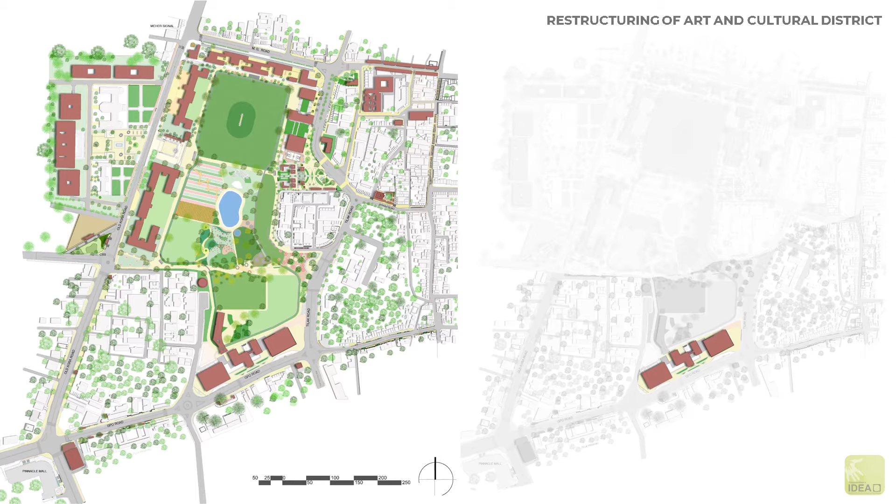The restructuring of Art and Cultural District. The site is located to the south of the open space at the northern edge of the GPO road. Alongside the site, we have the exhibition area towards the north, which further expands into the open space. Together with the exhibition space, this creates a realm of highly interrelated activities.

The restructuring of Art and Cultural District. The brief focuses on the idea of a creative central space housing all cultural activities. This area also functions as a buffer space to provide thoroughfare between the street edge and the open space.

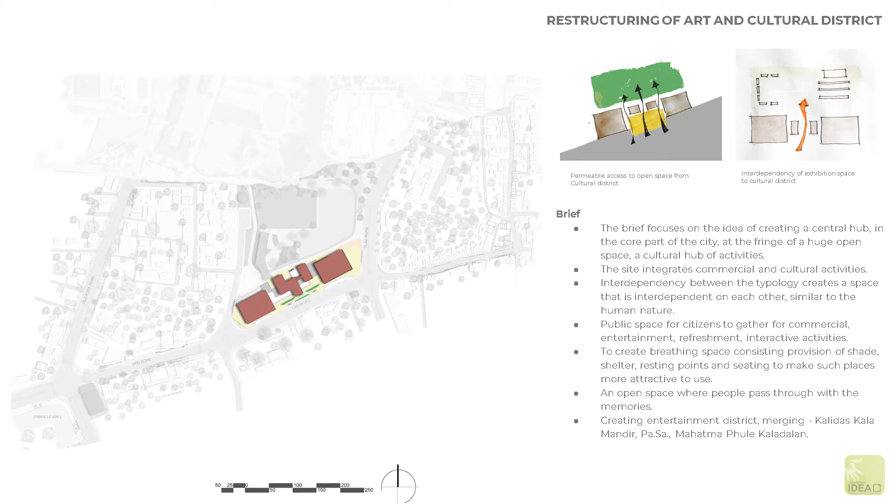The functions here are an amalgamation of these typologies in the precinct. This slide shows the structures that have been relocated into the campus to create one unit. Earlier, the entire area was disassembled and scattered.

Pre-existing Kalidas Kala Mandir, Parshuram Sai Khedkar Natyagruha, Mahatma Phule Kaladalan have lost their relevance and importance and have no homogeneity in terms of the structure.

The strategy was to integrate all these areas into one campus, improving their relevance as well as their interdependence. The site provides an indirect and direct thoroughfare to the Central Park from within the campus.

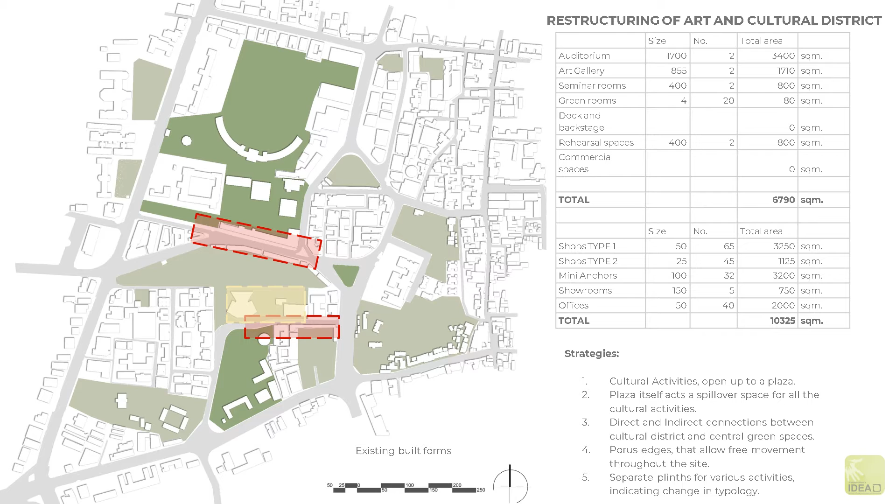The strategies involved in making the design were introduction of a plaza that itself acts as a spillover space for the cultural activities, porous edges that allow free movement throughout the site, and separate plinths for various activities indicating change in typology.

The project intends to integrate cultural buildings in the precinct into one district. It integrates commercial and cultural activities. Interdependency between the typology creates a space that is interdependent on each other.

The need to revitalize them stems from the deep-rooted history of Nasik and theatre and art. In order to revitalize both of them, along with Parshuram Sai Khedkar Natyagruha, they have been integrated into one campus to give them homogeneity and brought closer to the edge of the street to bring them into prominence.

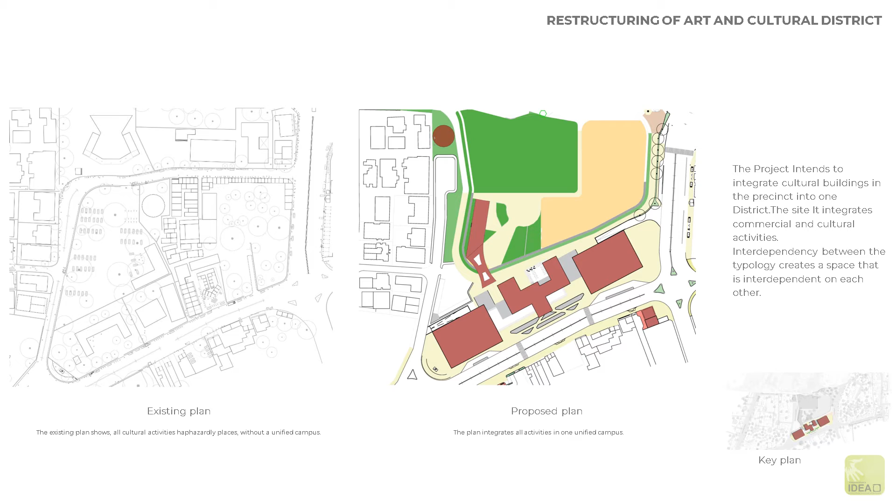Commercials become an aspect of revenue generation for these cultural buildings. These are the design options for the cultural district.

The first evolution of the form, although did provide large open spaces, it took away softscapes and added to the hardscapes, which was not suitable, and hence was rejected. It also occupied a larger area on ground.

The second variation solves this issue by moving the auditoriums to the ends of the site and creating a run in between for both public and commercial activities, making them interdependent. Also, vertically stacking the commercial helps reduce the footprint.

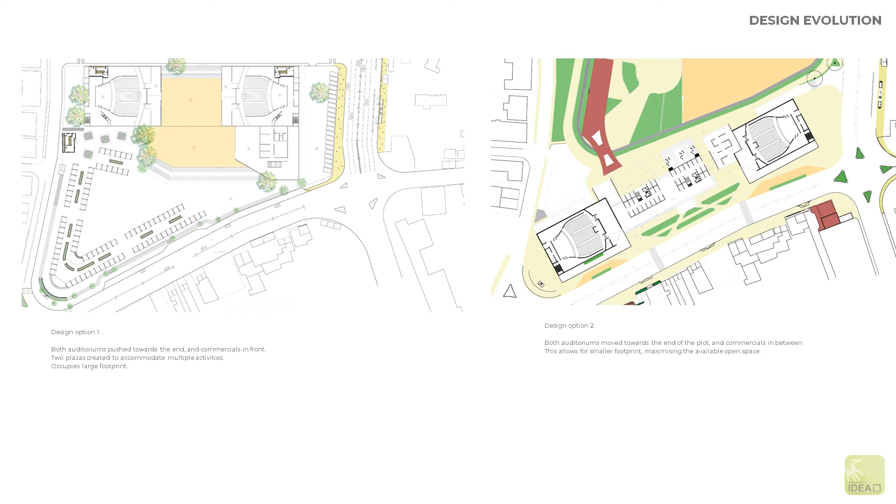Hence, the second variation was selected. The ideation for the build form allows for creation of plazas that extend naturally into one common space. Overhangs from the structures above allows for variation in the volume, making the space more humane.

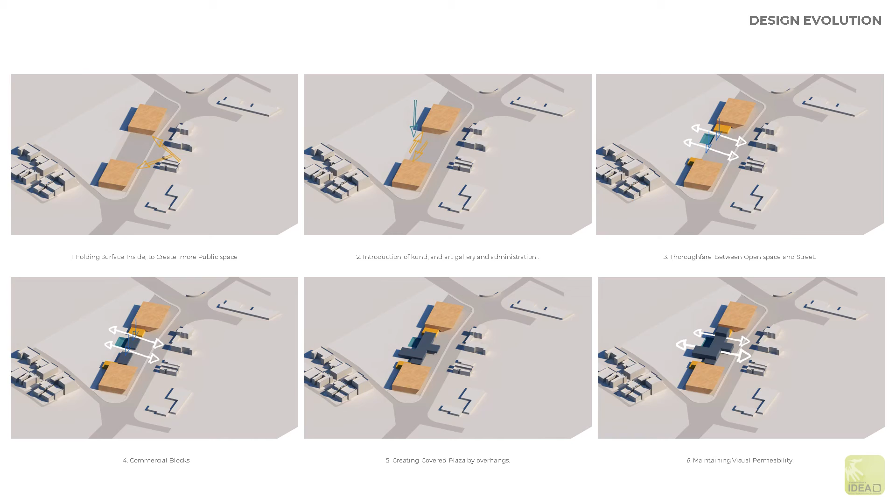Although the built mass is spread over the entire length of the plot, breaks and punctures are introduced to connect the street edge to the open space, physically and visually. The auditoriums open up to the main plaza naturally and thus act as a spillover space.

A kund at the rear becomes a connection between two levels and also acts as a large space for multiple activities.

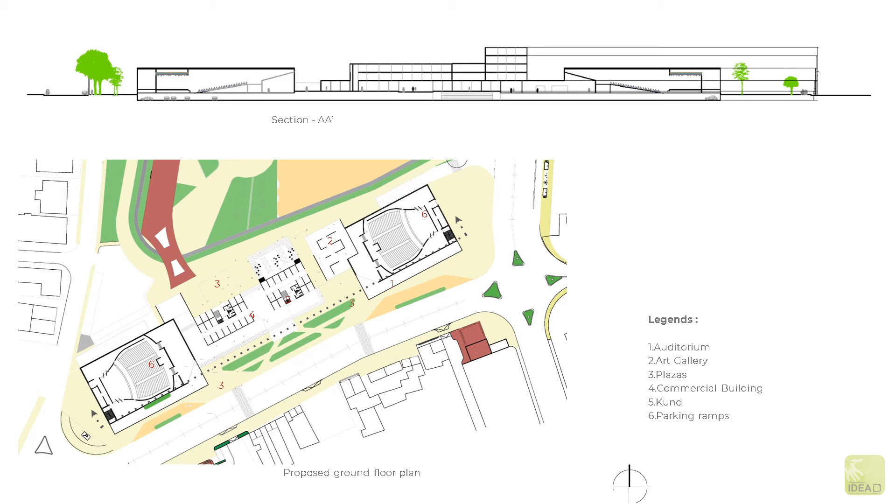The structure above replicates the commercial while also provides overhangs for the plaza below. The underground level parking provides for parking services for this structure and also other spaces in the vicinity to reduce the surface level parking.

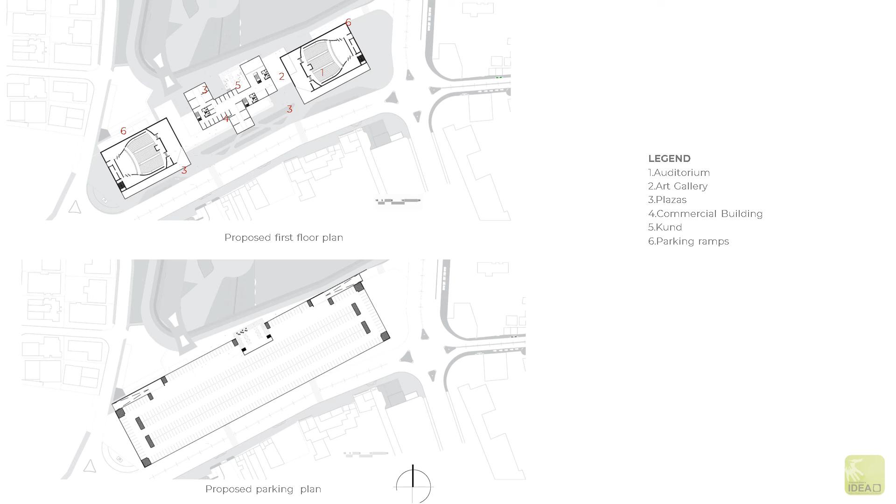These are the guidelines for the project. The site is restricted to 60 meters from the street edges, allowing to limit built mass within the green area above. The built mass is capped at G+3 to avoid overpowering the surrounding skyline.

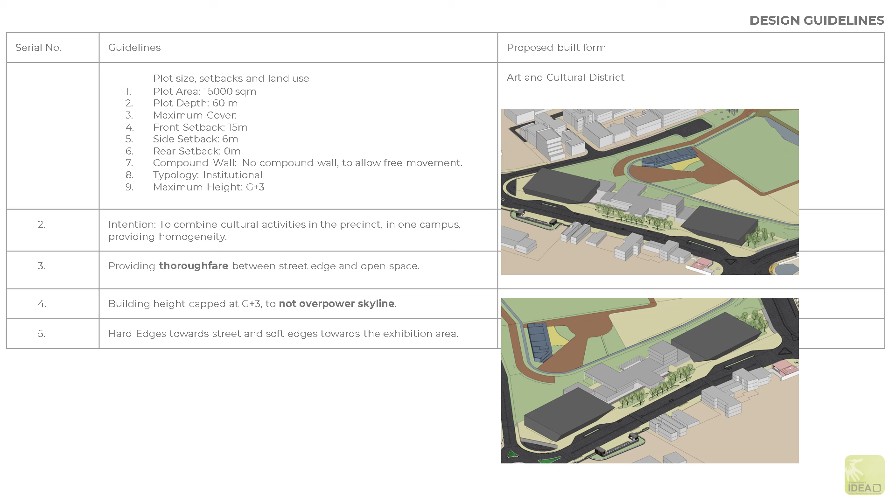Thoroughfare between the two edges of the site is necessary to provide a physical and visual link. This is a view of the main plaza. This main plaza extends naturally from the auditoriums outside.

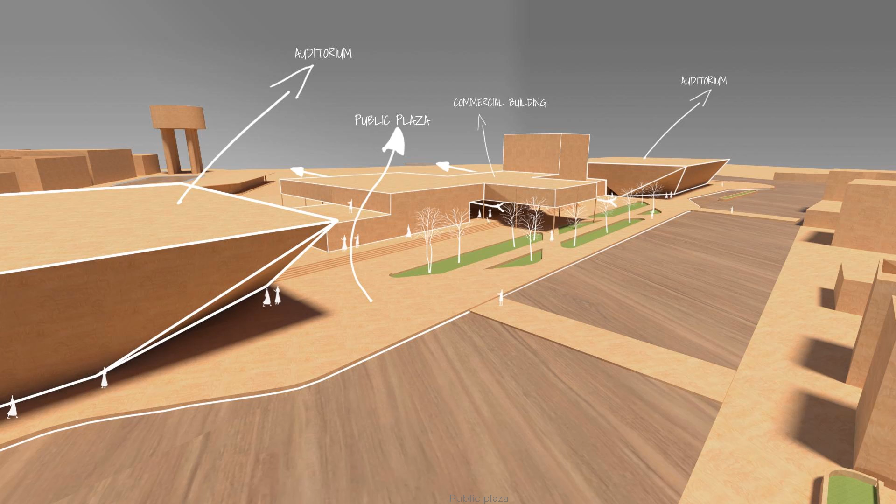This shows the physical and the visual connectivity between the two ends of the site, opening up into the open space.

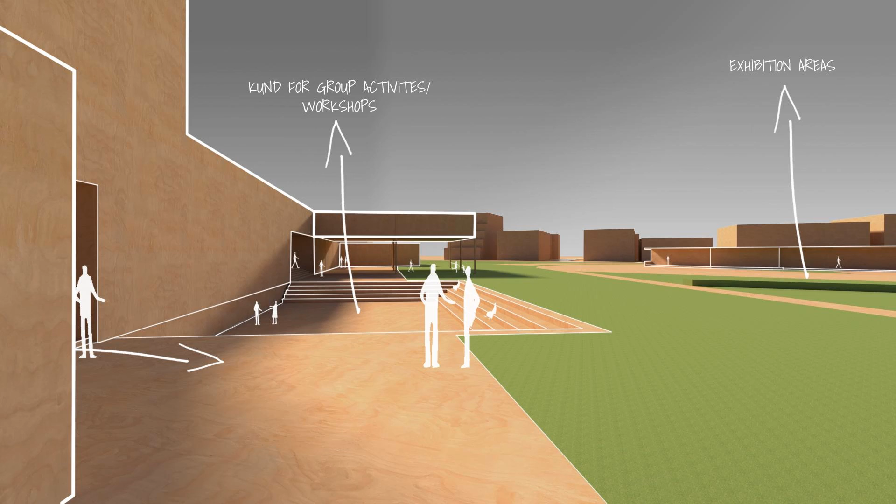This is a view of the Kund that houses multiple activities. This also leads on to the open space via the exhibition areas.